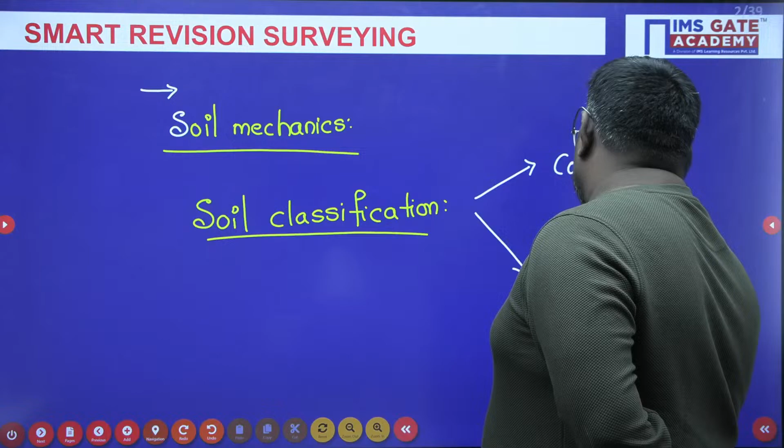Now, how do we classify these soil particles? If the percentage of soil retained on 75 micron sieve is more than 50%, we call it coarse grained soil. If the percentage of soil passing through 75 micron is more than 50%, we call it fine grained soil.

Now let me go in detail. We have some organizations like Public Road Administration, American Association State Highways Transport Officials, and Highway Research Board. All these organizations are related to roads, so they wanted to identify the soil best suited for pavements. They classified the soil into 7 groups, suitable for pavement design.

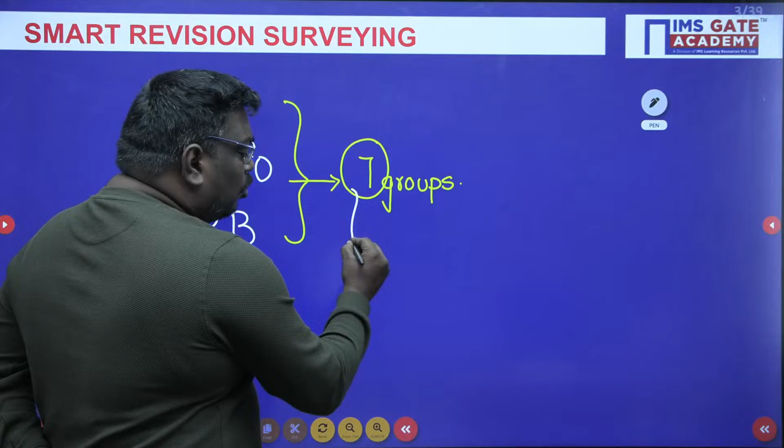Now these groups, when I talk about the 7 groups, what are the group names here? A1, A2 and so on up to A7 groups. There are 7 groups, meaning they have given the names A1 through A7.

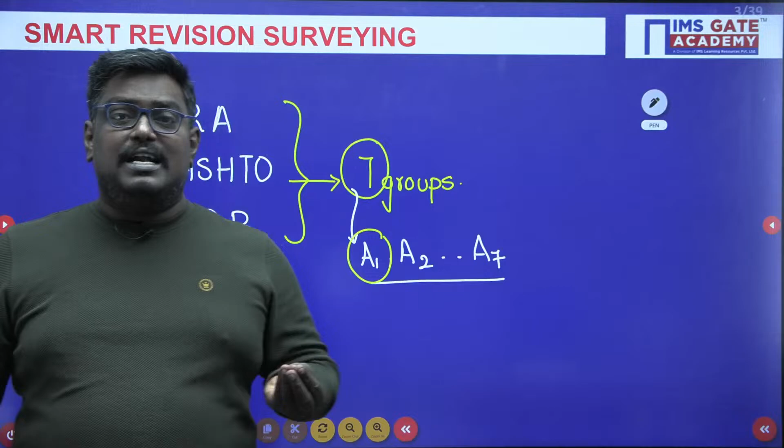Now my dear students, which is the best group? I would like to tell you, smaller the group number, better is the soil for pavement. So they can make a story in the GATE question, like these are some 7 groups, A3, A4 and A5, which is the best soil for pavement? So you remember that smaller the number, better is the soil for pavement.

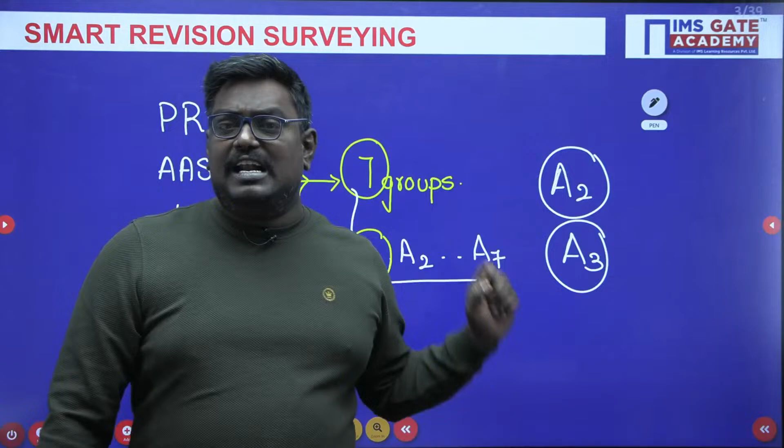Now suppose if there is Sai or Swetanshu, they might get a soil A2 and A3. Now they can ask me which is the best soil, A2 or A3, then definitely A2. But both have got A2, then which is the best soil?

Now comes the concept of group index, sir. Group index is a term. See students, group index is a term which is used to indicate the quality of the soil within the same group.

Muskan Ansari, sir, student from BSc Maths final year, eligible for GATE in CS? Muskan Ansari, when you are studying mathematics but want to write CS branch, I think you should have an engineering background. To be more clear, please join our Telegram group and I will be replying there. As far as I know, you should have an engineering background to write the computer science paper, but to explain you clearly, please join our Telegram group and I will go through the entire notification again on which other BSc students can write. But BSc Mathematics students, as of my knowledge, cannot write, I think.

Okay sir, now group index is used to indicate the quality of the soil within the same group. So when I talk about group index, if you have A1, A2, A3, it is a quantity used to indicate the quality of the soil within the same group.

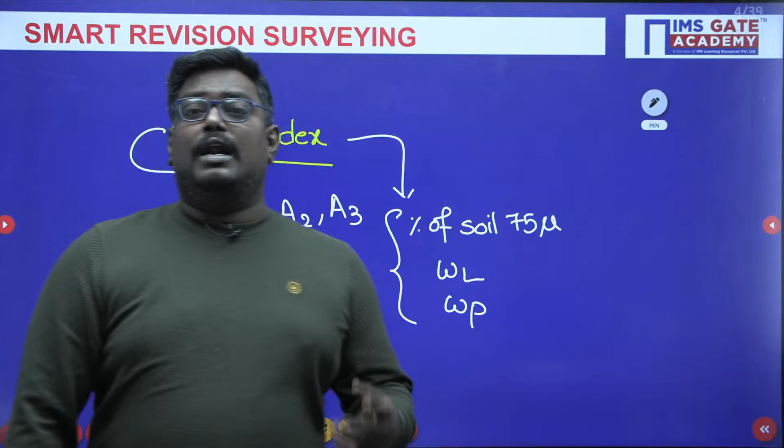Now see students, we have Casagrande. Casagrande has given a soil classification system name, the Airfield Classification system. Or you can say the Airfield Classification system was discovered by Casagrande.

Now my dear students, if I talk about the Indian Standard Soil Classification System, it is derived from the Airfield Classification system. The Airfield Classification depends upon grain size distribution, or particle size distribution, compressibility and plasticity characteristics.

Sir, you can ask me why I am explaining the theory part also. Nowadays in multiple select questions, you should have an idea what are the assumptions and on what basis they are classifying. So the Airfield Classification system is discovered by Casagrande, and the Indian Standard Soil Classification System is derived from it, so it also depends on the same parameters: particle size distribution, compressibility and plasticity characteristics.

Now my dear students, let me tell you one important thing. If you talk about gravel, how do we represent it? Gravel is represented by G, sand is represented by S, silt is represented by M, organic soils are represented by O, and clay is represented by C.

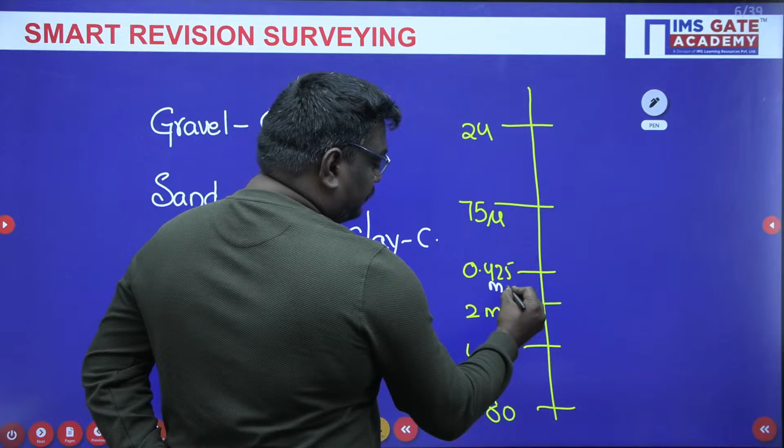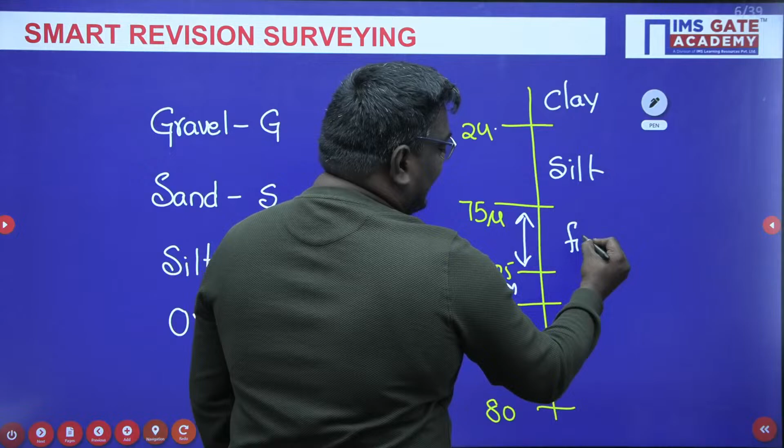Below 2 micron we call it clay, 2 micron to 75 micron it will be silt, 75 to 0.425 mm it is fine sand, 0.425 to 2 mm is medium sand, 2 mm to 4.75 mm is coarse sand, 4.75 to 80 mm is gravel, more than 80 mm is cobble, and more than 300 mm is boulder.

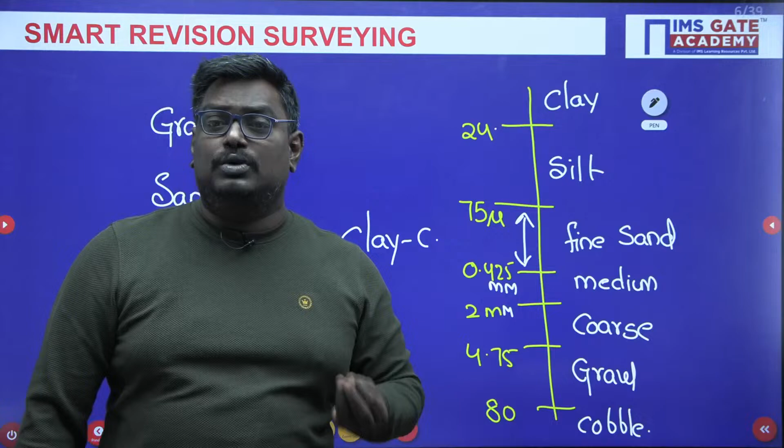Whenever you want to classify the soil, these ranges are very important, my dear students. That is the reason I have given you this insight.

Now coming to the most important topic, we have a topic called the plasticity chart. Let me tell you how this plasticity chart has been drawn. Obviously, one more thing: clay will have more plasticity.

When I talk about plasticity: when liquid limit is less than or equal to 35 percentile, we call it low compressibility. When liquid limit is between 35 to 50, we call it intermediate compressible. And when liquid limit is more than 50 percentile, we call it highly compressible.

These values are important. Remember, above the A-line means plasticity will be more, so definitely clay. Below the A-line, it can be an organic soil or it can be silt.

If you talk about the equation, please go through this: when liquid limit is less than or equal to 35, it is low compressible; 35 to 50 is intermediate compressible; and more than 50 is highly compressible.

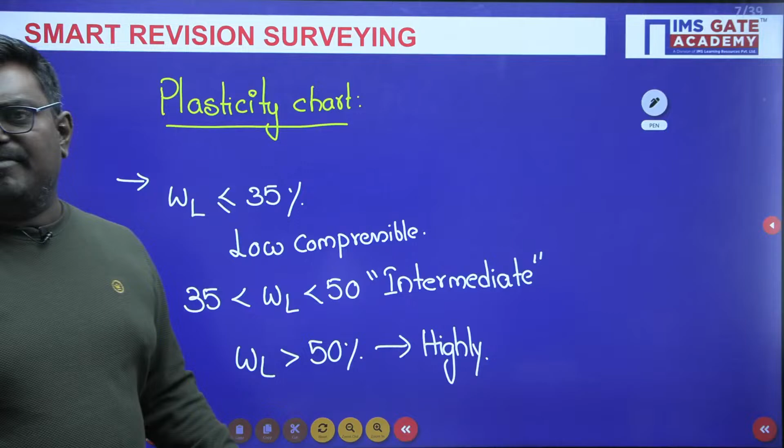So here what you have to do... yeah, greater than 50 percentile. Very good answer, Arvind. Now suppose if I have drawn the graph, sir.

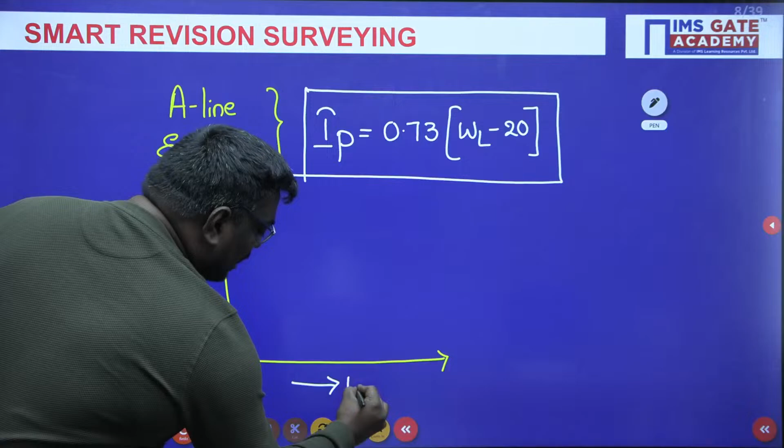If a graph is drawn between plasticity index IP and liquid limit WL, the A-line chart will look somewhere like this. If you see the intercept, it is 20, so you have to maintain this value as 20. Now I will draw the lines here: this will be equal to 35 and this will be equal to 50.

When the value is between 4 to 7, taking this value as 4 and 7, here you will have the dual nature of the soil, that is, it will have both clayey nature and silty nature. Very good answers by Arvind, sir.

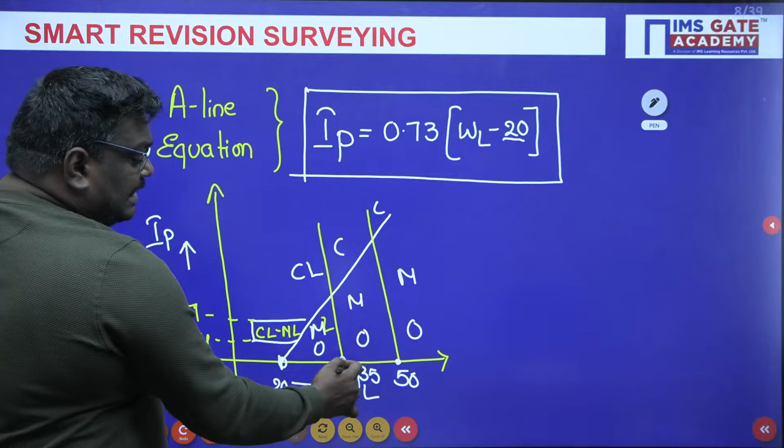Less than 35: above the A-line we call it clay, so I'll write C. Below A-line it can be M or organic soil. Less than 35 you call it L (low). 35 to 50 is intermediate, so I. More than 50 is highly compressible, so H. The plasticity chart is helpful in classifying soils.

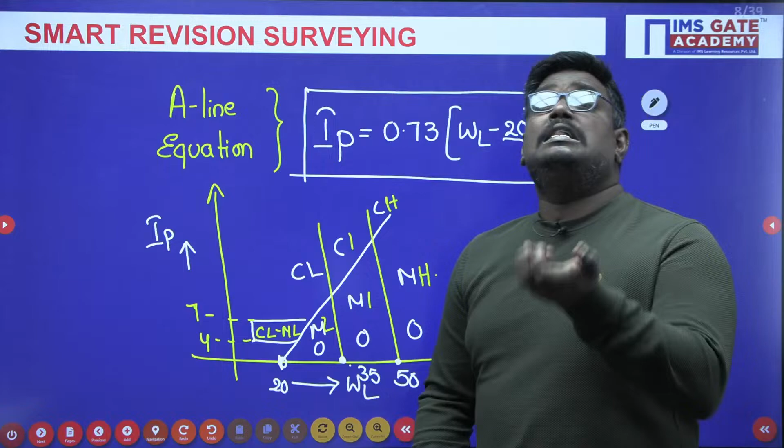So how the soil is classified: suppose if they give you liquid limit as 40 percentile and plastic limit as 25 percentile, what will be the IP value? WL minus WP, 40 minus 25 is 15 percentile.

But if you calculate from the A-line equation, you will also get IP. IP is equal to 0.73 into 40 minus 20. If you calculate this, you get around 14.66. So the A-line is located at 14.66.

But what is the value you got? 15. Is 15 above or below the A-line? The A-line is located at 14.66, and IP is 15, which you calculated from the traditional method, that is WL minus WP. So from that it is more, meaning 15 will be somewhere here, above the A-line.

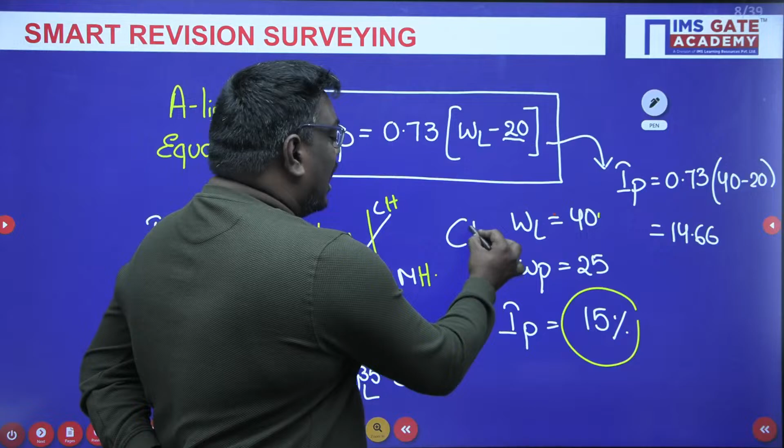Above the A-line means it will be clay. And remember, the liquid limit is between 35 to 50, so the answer will be CI. Are you getting this, my dear students? So again I would like to repeat here.

What I would like to tell you is, first calculate the location of the A line. Very good answer, Arvind. The location of A line is 0.73 into liquid limit minus 20, and you got A line as 14.66. By traditional method, IP equals WL minus WP, you will get 15. So it is 15, more than 14.6.

Why it is low? See, Arvind, you are wrong. Just check it up. Because here, what is the liquid limit value? Liquid limit value is 40 percentile. It is not 35. 40 is in between 35 and 50, so it is an intermediate compressible. I hope you are clear, Arvind.

Okay, now see students, you can ask me one more thing, sir. Very good answer. One more thing you can ask me here is, sir, how do I differentiate organic soil and silt soil?

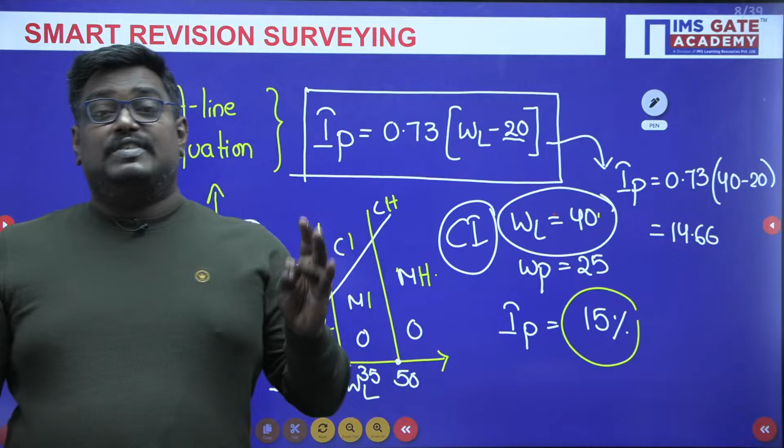Now the logic is simple. In case of organic soils, there are some specified tests. First we have the color test. Color of organic soils will be dark grey or brown color. Second, the odor of the organic soil is very bad.

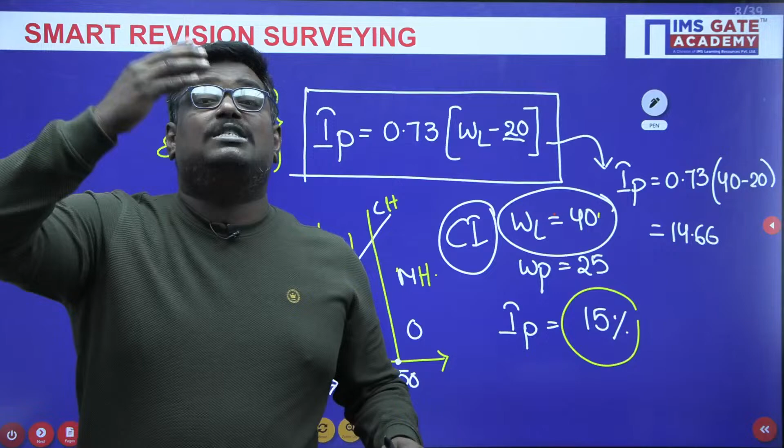The third point, a very important point: the liquid limit after oven drying reduces by more than 25%, then we call it organic soil. If the liquid limit after oven drying reduces by more than 25%, then we treat it as organic soil. That is a very important test.

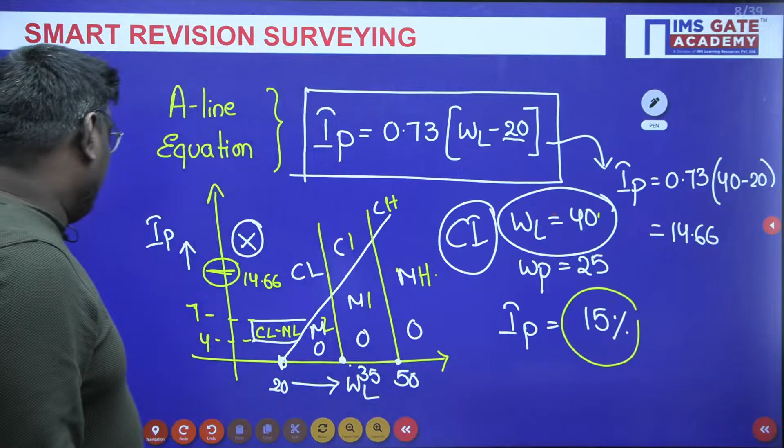Next, sir, what do you mean by fines? Fines is nothing but the percentage of soil passing through 75 micron. When fines are less than 5 percentile, we talk about either well-graded gravel or well-graded sand concept. And remember, if the fines are more than 12 percentile, we talk about clayey or silty nature.

But when the fines are between 5 to 12 percentile and IP value between 4 to 7, you will have dual nature of the soil samples.

Here I would like to tell you, suppose they have given you silty sand, how do you represent it? Silty sand means the sand composition is more than silt composition. So as you move towards the right, the composition increases, so first give priority to composition. So sand is represented by S and silt is represented by M.

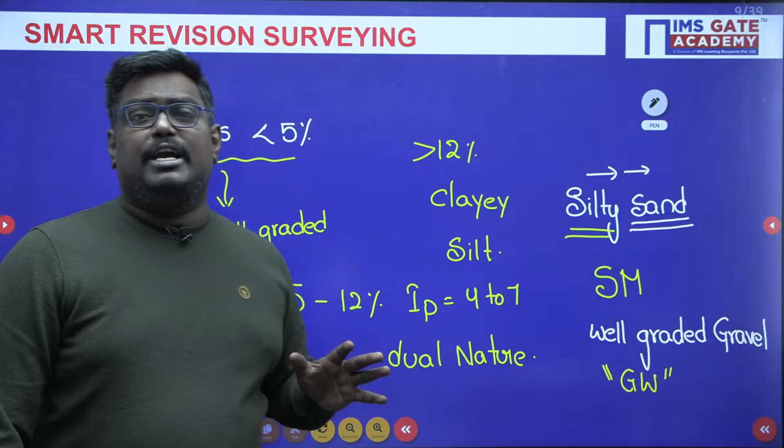Suppose if they give you well-graded gravel. Now students, if they ask you what do you mean by well-graded gravel. Very good, sir. So when you talk about well-graded gravel, it can be GW. What I would like to tell you is, when fines are less than 5%, we talk about either well-graded or poorly graded; we will not talk about clay nature or silty nature.

So let me quickly revise the concept related to soil classification. Public Road Administration, Highway Research Board, and American Association of State Highways and Transport Officials wanted to identify the soil best suitable for pavement. So they classified the soil into 7 groups, A1, A2 through A7. Smaller the group, better is the soil for pavement.

But if the soils are of the same group, then group index is used to indicate the quality of the soil within the same group. Group index is based on percentage of soil passing through 75 micron, liquid limit and plastic limit. When I talk about Casagrande, he discovered one classification system called the airfield classification system.

Indian standard soil classification system is derived from the airfield classification system. Indian standard soil classification depends upon particle size distribution, compressibility and plasticity characteristics. Here we have two types of soils: one is coarse grain and the other is fine grain. If the percentage of soil retained on 75 micron is more than 50%, we call it coarse grain. If the percentage of soil passing through 75 micron is more than 50%, we call it fine grain.

Here clay is represented as C, silt is represented by M, sand is represented by S, gravel is represented by G, and organic soils are represented by O.

When liquid limit is less than or equal to 35, we call it low compressible. From 35 to 50, it's intermediate compressible. More than 50, it is highly compressible.

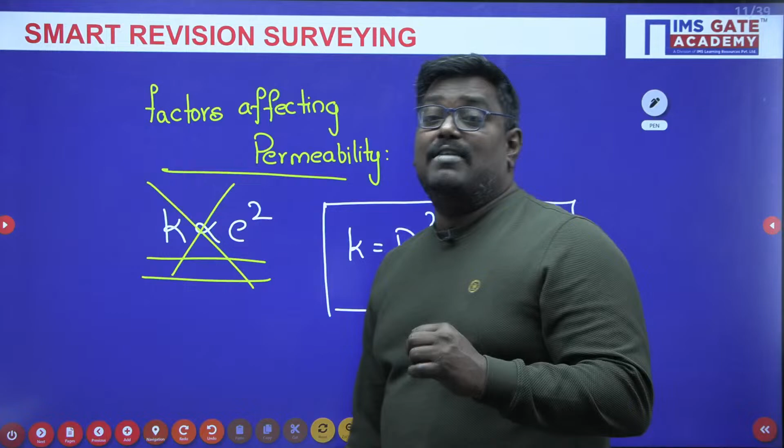Why? Because permeability will be less in case of clay and silt, and permeability will be more in case of gravel and sand. This is a very important observation. Permeability will be more in gravel and sand where the void ratio is less, because permeability depends upon the size of the void.

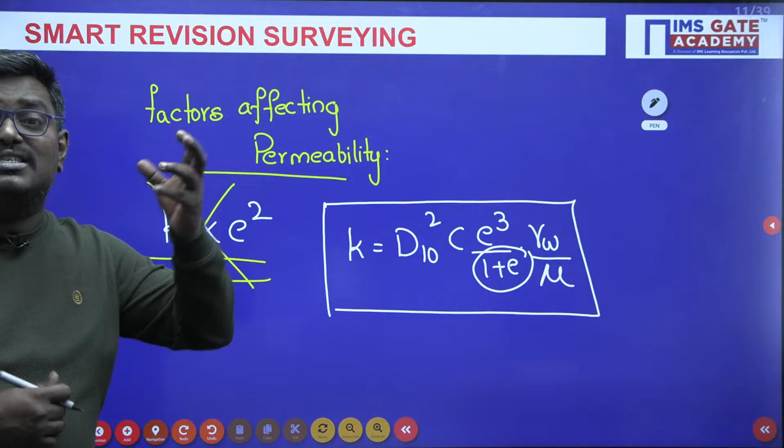If it does not depend on void ratio, actually more the size of the void, more the flow; less the size of the void, less the flow. So practically permeability is inversely proportional to the void ratio. But more precisely, permeability talks about the size of the void, not the void volume or anything.

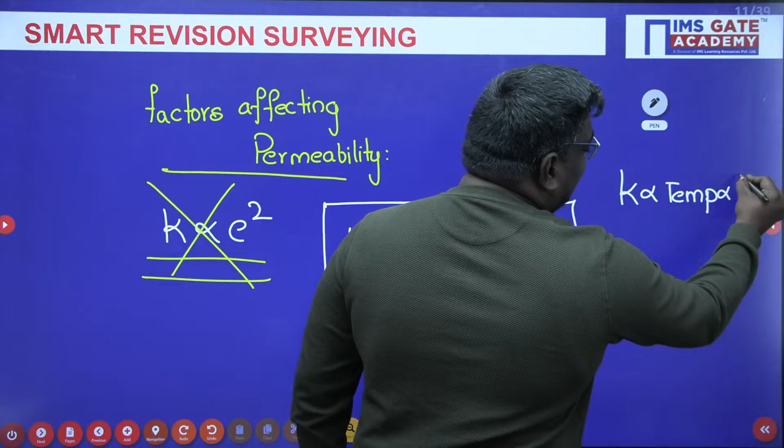Next, permeability increases with increase in temperature with a decrease in viscosity. How will I explain this? Suppose if you pour some oil on the floor, to scatter the oil, it will take more time. But if you heat the oil, it loses its viscous nature and the flow will be more.

Permeability increases with increase in temperature with a decrease in viscosity. What I am telling you is, if I have taken an oil which is viscous in nature, and I try to boil the oil, whatever oil is boiled will easily flow. So that is one of the other important factors.

Another important thing is, permeability will be more for fully saturated soils when compared to partially saturated. Why? Because fully saturated means voids are completely filled with water. More the water, more the permeability; less the water, less the permeability.

Now, what are the tests to determine permeability? The first one we have is the constant head test. In constant head test, head is kept constant and discharge is measured. It is very difficult to maintain the head constant in fine grained soils, that is the reason constant head test is suitable only for coarse grain.

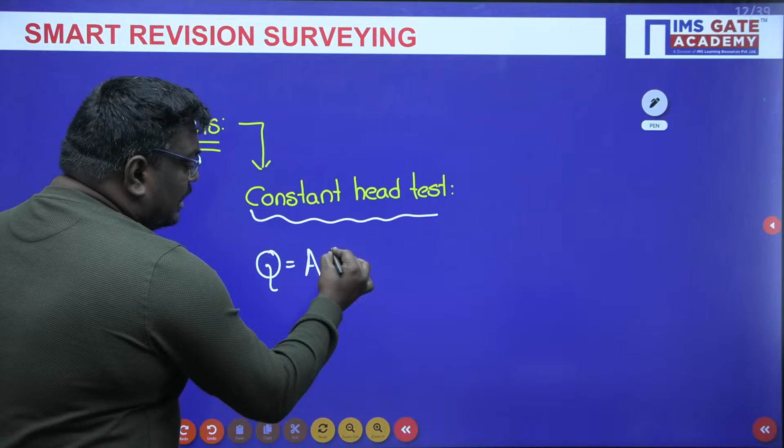Why constant head is suitable for coarse grain is, it is very difficult to maintain the head constant for fine grained particles. Here, constant head test Q is given by the formula Q equals A into I into K. You already know the continuity equation, Q equals AV, V equals IK. If you plug in those values, you get discharge equals AIK.

Next we have the variable head test. In the name itself, it is variable head test. What do you mean by variable head test? The head is consistently changing, that is the reason variable head test is also known as falling head test.

This test is more suitable for fine grain, because when you look at soil classification, sedimentation analysis is done to classify fine grain, since fine grain particles do not settle immediately. If you drop my pen, it immediately falls due to weight, but very tiny particles take some time to settle. So for variable head test, it is very difficult to maintain the head constant, hence the name.

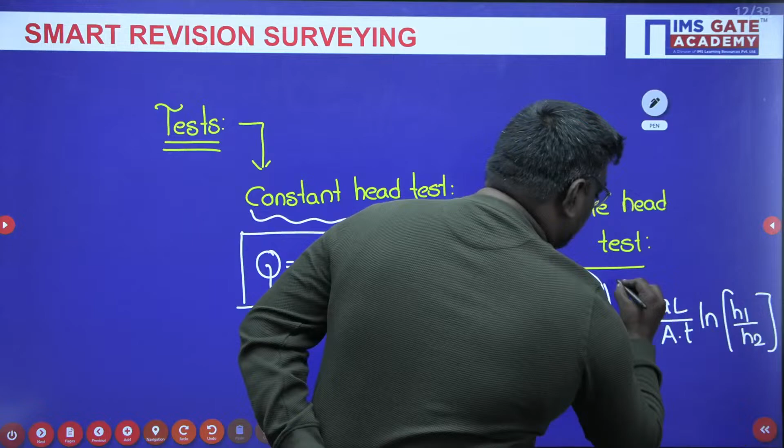So it is given by the formula K equals aL by AT into ln of H1 by H2. This is the formula for coefficient of permeability. Now, what is a? Small a is the area of the standpipe.

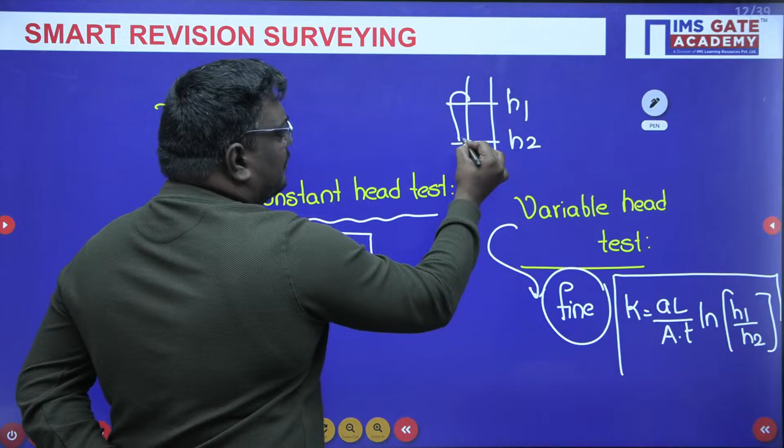L is the length and capital A is the area of the sample. T is the time taken for head falling. Suppose the head is at H1 here and sample is here, head is at H2. Time taken for head falling from H1 to H2 is nothing but T. And ln is natural log.

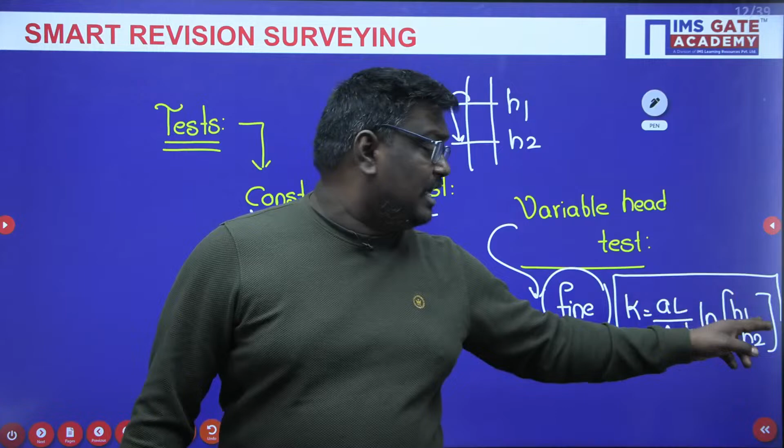If you want to remove the natural log, multiply with 2.303, because some people might be confused, asking why I have not written 2.303. If I write 2.303, then ln will become log to the base 10. So this is the formula for variable head test.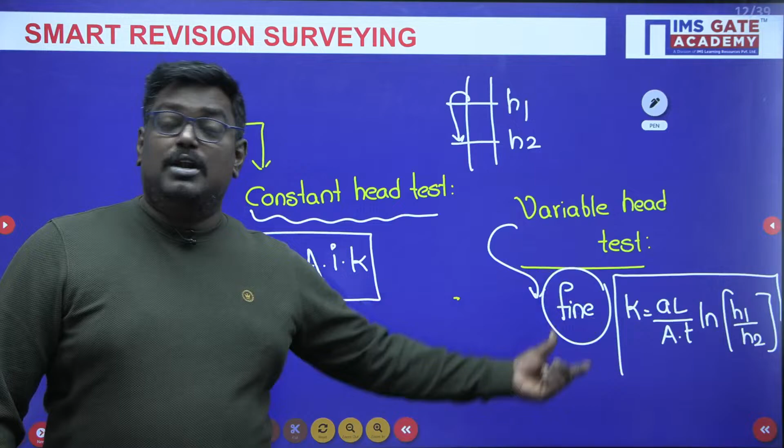Constant head test is very suitable for coarse grained soil, and variable head test is suitable for fine grained particles.

Now we have another concept called horizontal permeability, or permeability in parallel flow. Let's see the conditions, since most people worry about the formula, but here the conditions are very important. In horizontal permeability or parallel flow, discharge will be summation between the layers of soil, but head loss will be constant.

These things will help you in solving the problem. So in horizontal permeability, discharge will be summation, and horizontal head loss will be the same.

Now, horizontal permeability KH can be written as: KH equals summation from i=1 to n of Zi Ki, where Z is the depth of the soil strata, divided by summation from i=1 to n of Zi. Remember, this is the formula for horizontal permeability.

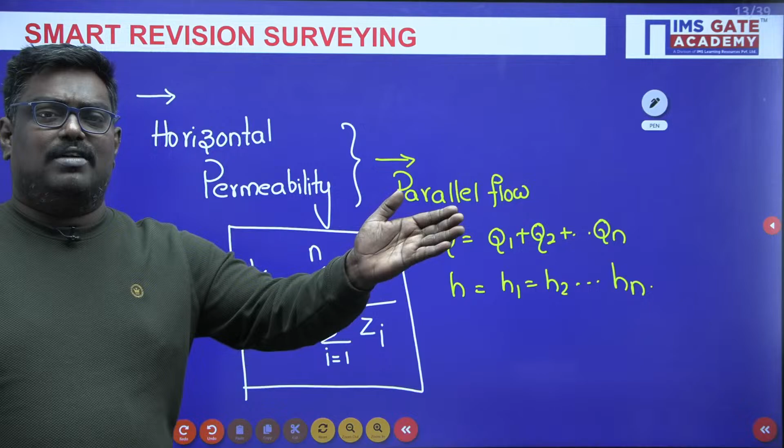So you can simply write Z1K1 plus Z2K2, upon Z1 plus Z2, if you take two layers. This is how the formula works for horizontal permeability.

I might be fast in this session because, by name itself, it's a revision session. I am hoping that you people are already aware of the knowledge.

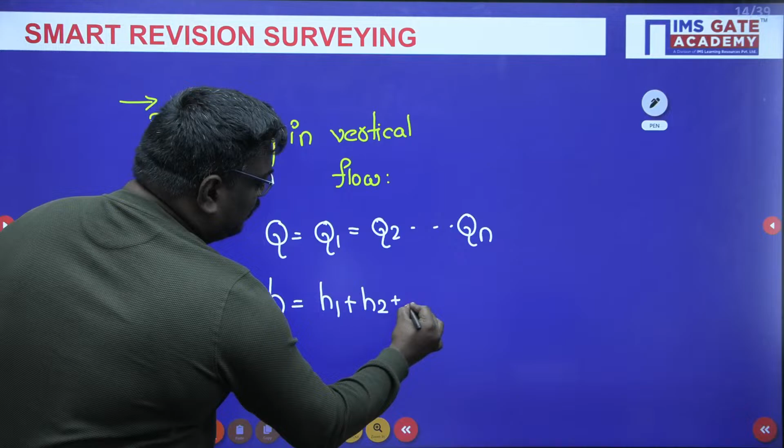In perpendicular flow, discharge will be constant. And remember, head loss will be equal to summation. So you can understand here: discharge will be the same and head loss will be summation in case of permeability in vertical flow.

Now when I talk about vertical permeability, it is given by the formula: summation from i=1 to n of Zi, divided by summation from i=1 to n of Zi/Ki. And this is for vertical flow.

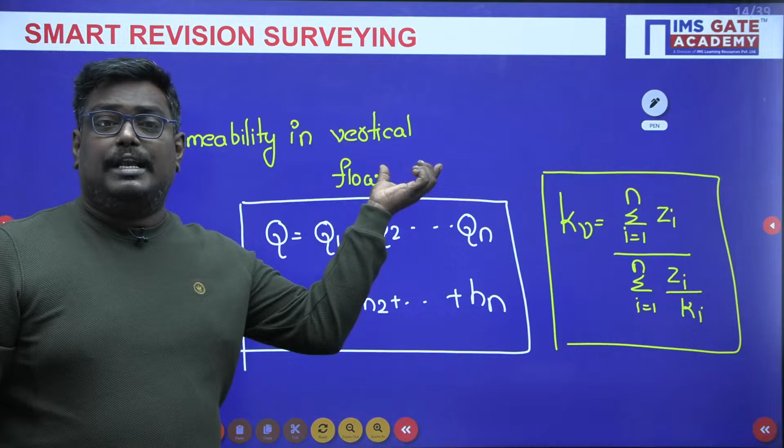See, with these conditions, people actually try to solve the problem. Remember, whenever they ask you about vertical flow or perpendicular flow, the formulas will be the same.

You should know that in perpendicular flow, or vertical flow, discharge will be the same and head loss will be the summation. These things you should be aware of.

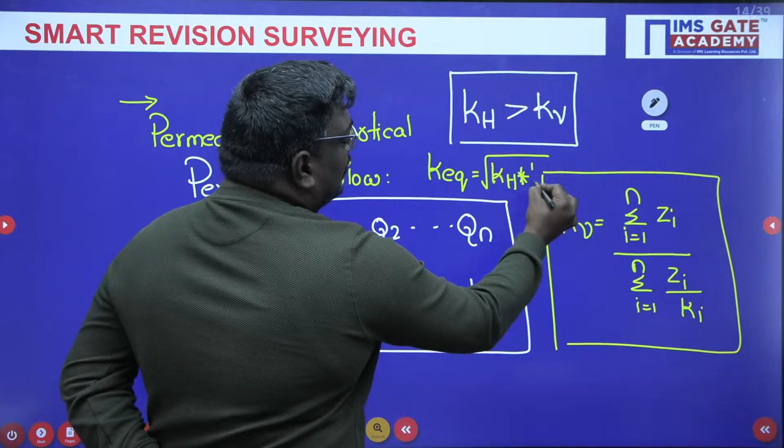You should understand that horizontal permeability is always greater than the vertical permeability. Remember, the equivalent permeability is nothing but the square root of KH into KV. Take the same values of Z1 and K1 and calculate horizontal permeability and vertical permeability. When you solve it mathematically, you can also prove that horizontal permeability is always greater than vertical permeability, and K equivalent is square root of KH into KV.

We have another concept called seepage velocity. Seepage velocity is given by the formula: Vs equals velocity upon porosity. The range of porosity is always less than 1, so seepage velocity is always greater than the actual velocity.

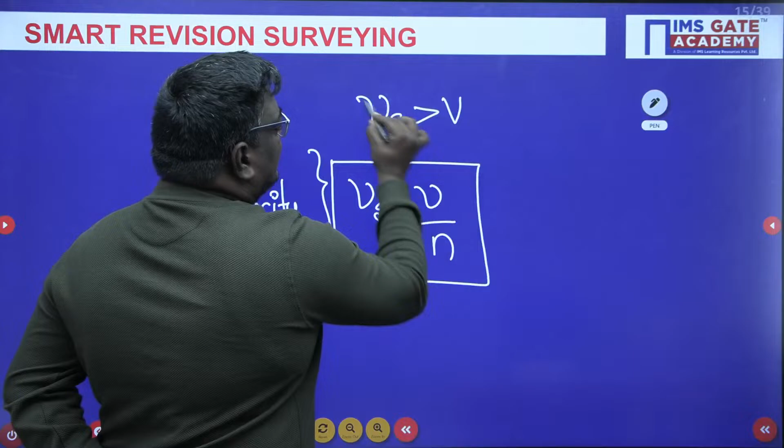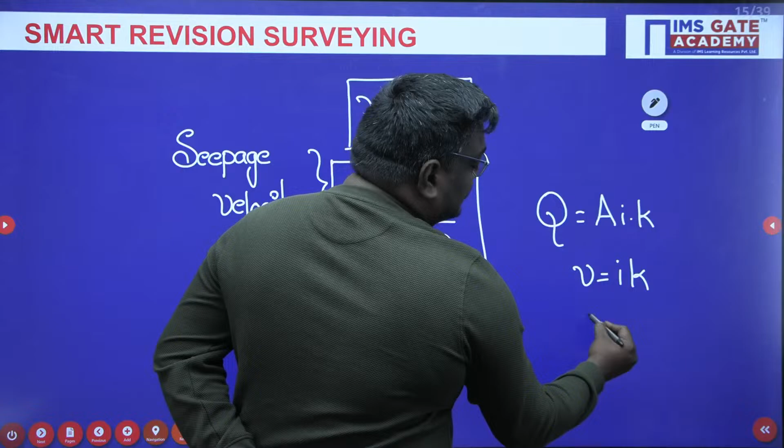With these formulas, we have seen very good questions in 2021 also. Q is equal to AIK, V is equal to IK, and seepage velocity is equal to velocity upon N. Using these formulas, they gave a 2021 GATE question.

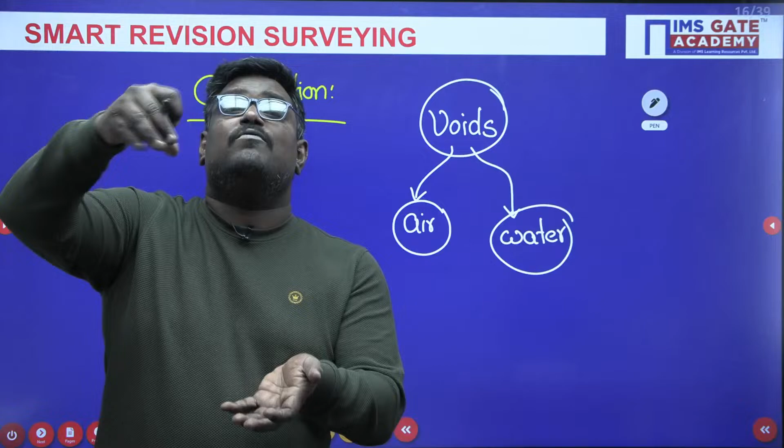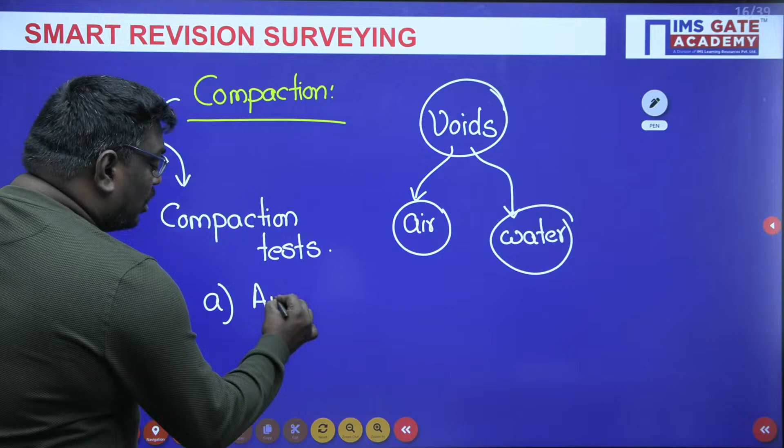Now see students, we have compaction tests like Indian Standard Lightweight Test, also called Indian Standard Proctor Test. Similarly, we have another test called Modified Proctor Test, also called Indian Standard Heavyweight Test. All these tests are done to determine the amount of compaction.

What do you mean by amount of compaction? It is nothing but the dry density. So compaction tests are done to determine the amount of compaction.

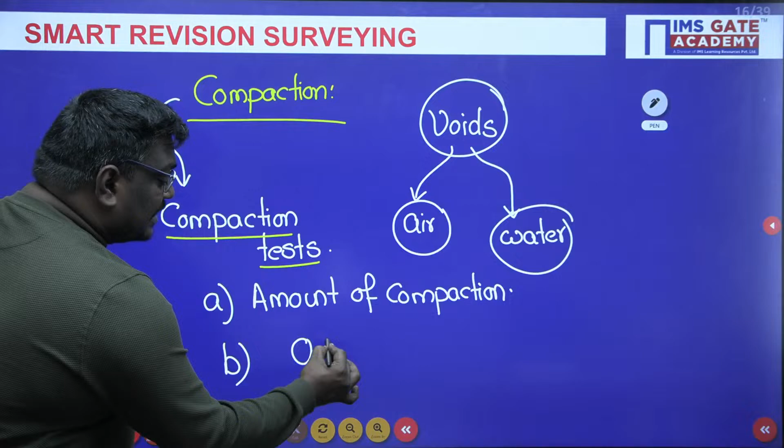The next thing is it is also used to determine the OMC. OMC means what? It is nothing but the optimum moisture content, the water content at which dry density is maximum. We call it optimum moisture content.

So what do you mean by compaction? It is the removal of air from the voids under a short-term moving vibrating loads. So compaction tests are done to determine the amount of compaction and also to determine the OMC, that is the optimum moisture content.

Now see students, when I talk about the Indian Standard Lightweight Test, or the Standard Proctor Test, there can be a question asked, sir. In Standard Proctor Test we have a cylindrical mold of 1 liter, and soil is arranged in 3 layers.

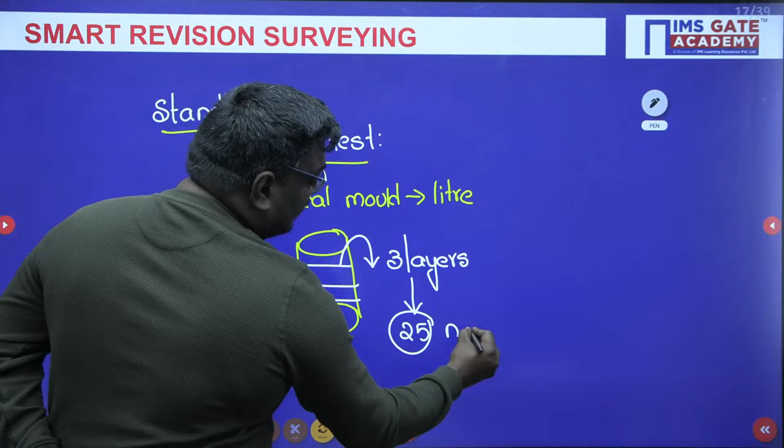Soil is arranged in 3 layers, and each layer is given how many blows? 25 number of blows are given for each layer. And what is the hammer weight, sir? Hammer weight will be 2.90 kg. And what do you mean by height of fall? Height of fall is equal to 31 centimeter.

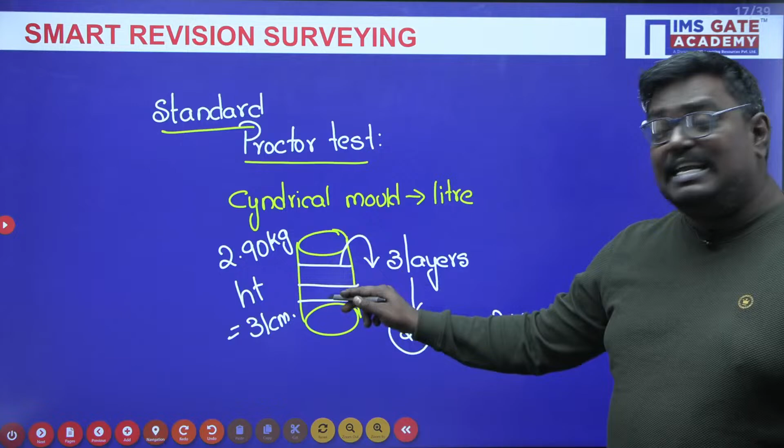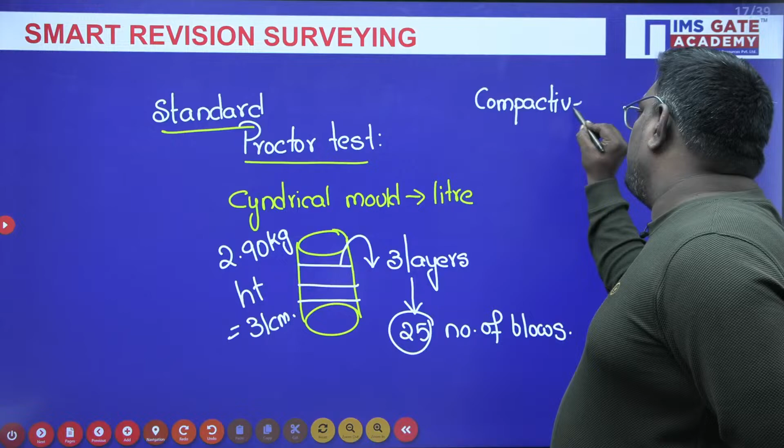So see students, when I talk about Indian Standard Lightweight Test or Standard Proctor Test, soil is arranged in 3 layers and each layer is given 25 number of blows. Sir, this can be a question asked in GATE: what is the compactive effort of Standard Proctor Test or Indian Standard Lightweight Test?

They can ask you this. See, whenever you are dropping a ball from a height, 31 centimeter or 310 mm, it will be converted to potential energy. Similarly, if you are applying blows, that is nothing but potential energy, which is mass into gravity into height.

So what is the weight of the hammer? It is nothing but 2.90 kg. And how many blows are you giving, sir? 25 number of blows. And how many layers? 3 into 9.81 into height of fall, which is 31 centimeter, or 0.39... actually 0.31 meter.

So it will be around how much, sir? If you solve this, you will get the value of the compactive effort of the Standard Proctor Test. If you solve this, you will get a value of 593.01 Newton meter. So I have given you the procedure, but some people might remember this directly. The compactive effort of the lightweight test or Standard Proctor Test is 593.01.

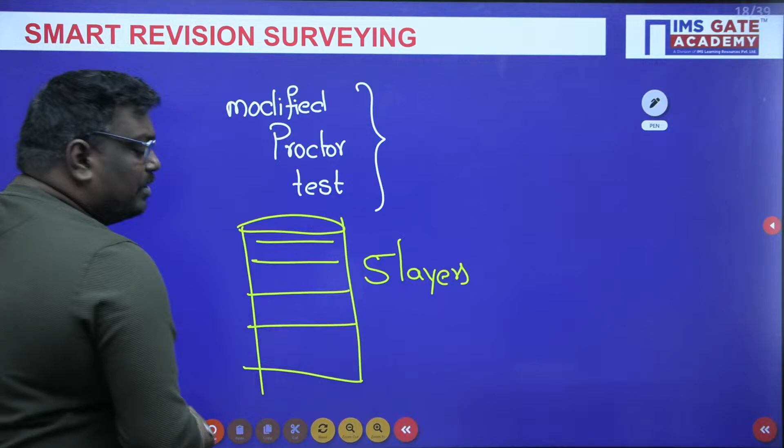Similarly, my dear students, when I talk about the Modified Proctor Test, also called the heavyweight test, here soil is arranged in 5 layers. The cylindrical mold here will also be 1 liter only, and each layer will be given 25 number of blows.

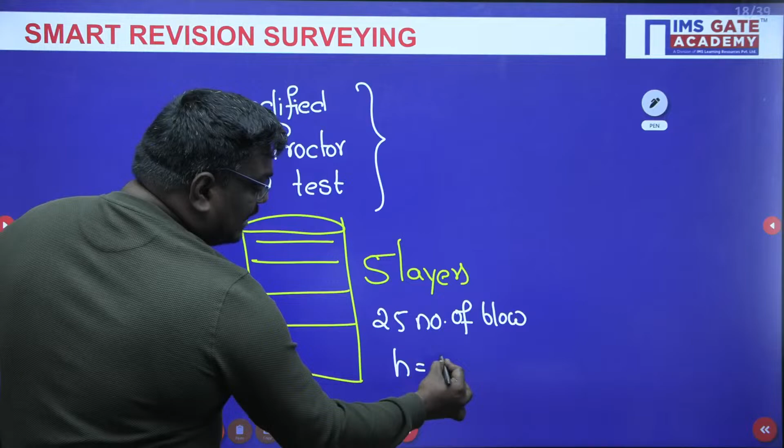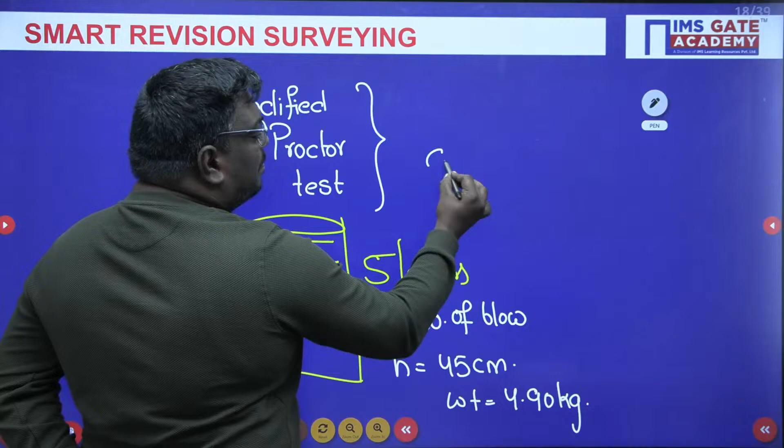And height of fall here will be 45 centimeters, and the weight of the hammer will be 4.90 kg. Now if you see, what is the compactive effectiveness of modified Proctor test? It will be 2703.88 Newton meter. Same formula, sir, mgh if you apply, it will be equal to how much? 2703 Newton meter.

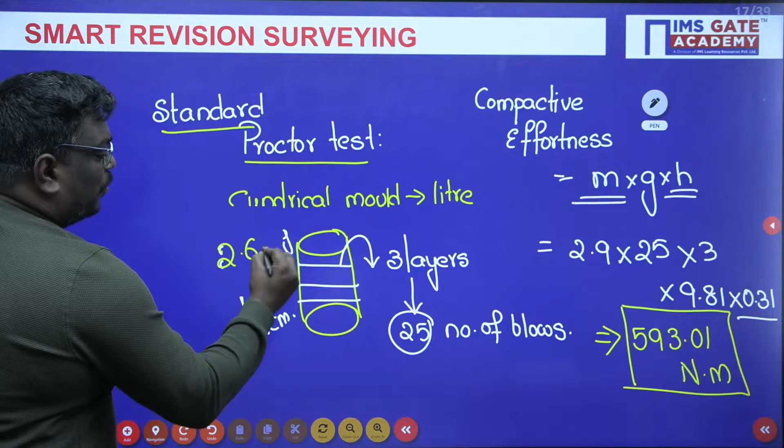Sir, here you can change. Actually I thought here it is 2.60 kg. Very good, Ammu, very good. Very good, Arvind. Here also you can change, sir. Here it is 2.6 into 25.

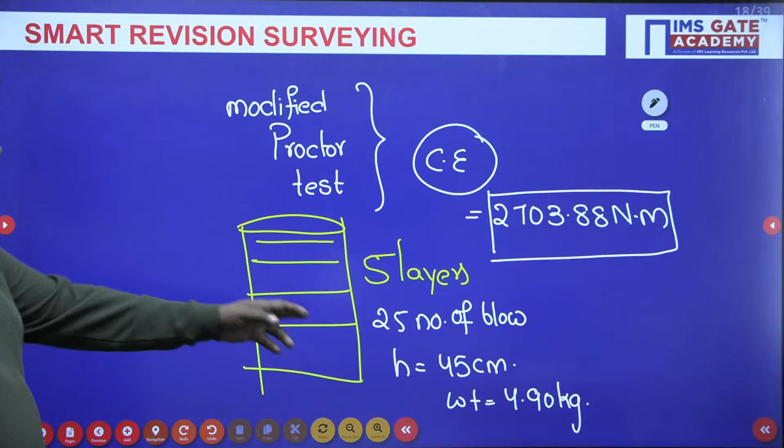Very good, Arvind. But here, students, it will be 4.90 kg, 45. Now how many layers, sir? 5 layers, 5 layers into 25 number of blows. Weight of hammer is 4.9 kg into 9.81 into height of fall is 0.45. If you solve this, you will get a value of 2703.88 Newton meter. Remember, this was a gate question.

Compactive effectiveness of modified Proctor test is 4.55 times the compactive effectiveness of standard Proctor test. And remember, if the soil retained on 4.75 mm is more than 20 percent, the cylindrical mold of 1 liter will be increased to 2.25 liters, and the number of blows will be increased from 25 to 56.

So what are the factors affecting compaction? Before going to the factors affecting compaction, you should be aware of this diagram.

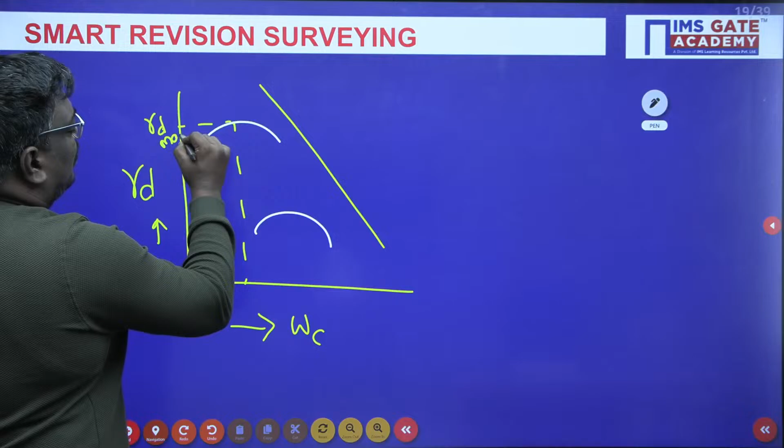If I draw a graph between dry density and water content, see students, even at lower water content, you are seeing maximum dry density. So this is the advantage of modified Proctor test. If you talk about standard Proctor test, even at higher water content, you are getting lesser dry density. And this is known as zero air void line.

My dear students, practically nowadays no one is using standard Proctor test. Everyone is using modified Proctor test in the field. If you consider highways or everywhere, people are using modified Proctor test only. And here, dry density is given by the formula: 1 minus Na, where Na is the percentage of air voids, into gamma W into G, upon 1 plus water content into G.

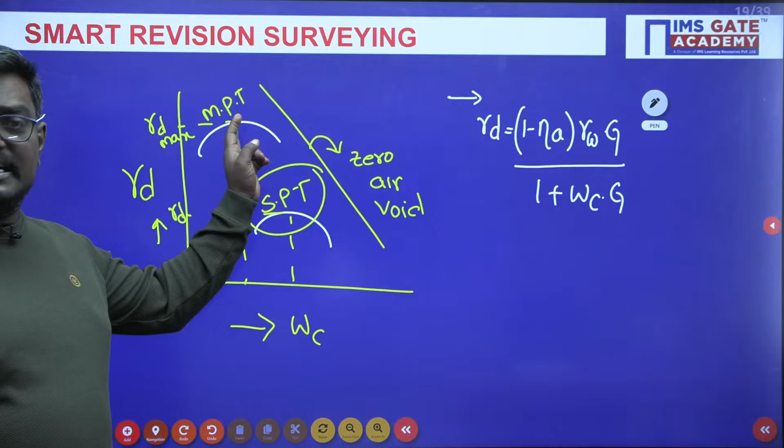So, students, what are the factors affecting compaction? They can ask you this. As water content increases, dry density increases, reaches a maximum value and then decreases. Another factor is, more the compactive effectiveness, more the dry density. And similarly, pure sands don't have a well-defined OMC.

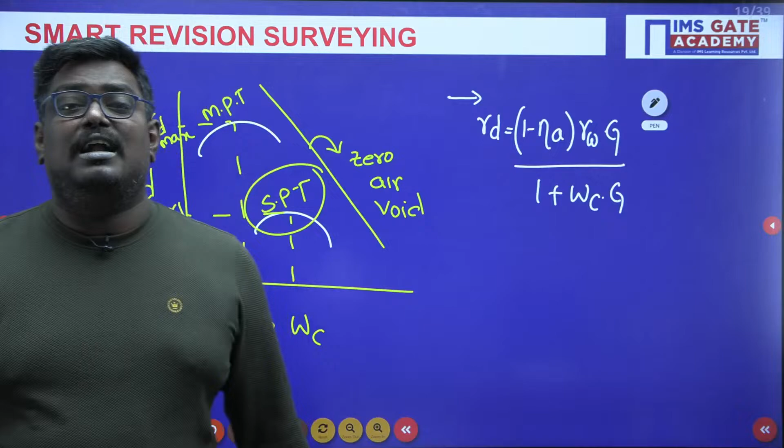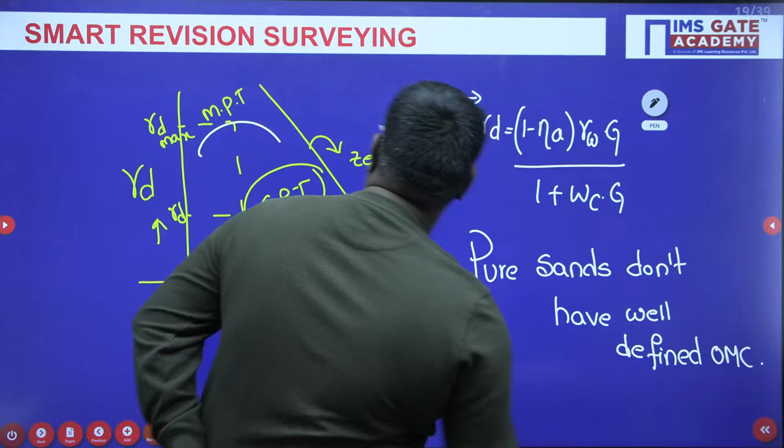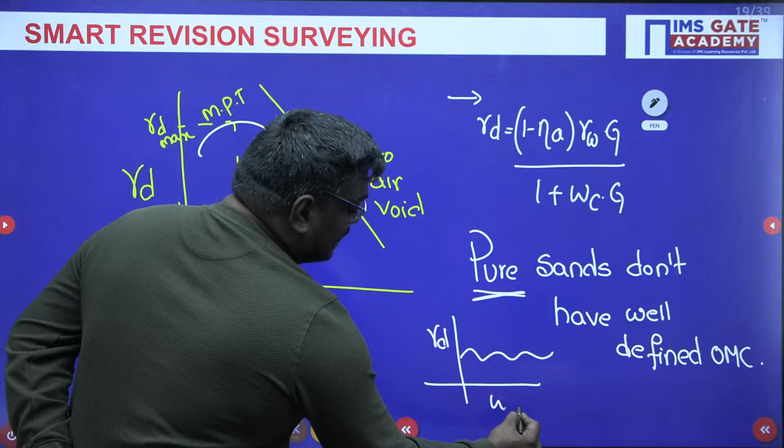This point everyone will ask me in the offline class also. Pure sands don't have a well-defined OMC. What is OMC? I told you, optimum moisture content. Here, this point is called the OMC of modified Proctor test and this is the OMC of standard Proctor test. OMC is the water content at which the dry density is maximum. But pure sands don't have a well-defined OMC, meaning the dry density versus water content curve will look like this - you cannot examine exactly where the dry density is maximum. There can be various locations. That is the reason pure sands don't have a well-defined OMC.

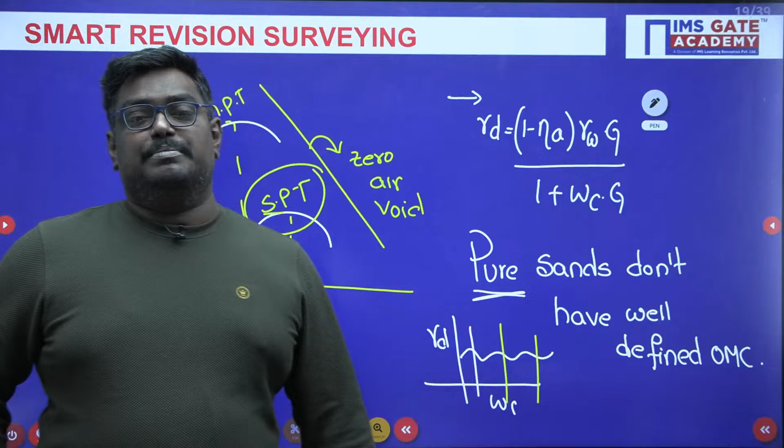Now, similarly, if I talk about relative compaction, what do you mean by relative compaction? Relative compaction is nothing but dry density in the field divided by maximum dry density in the laboratory, into 100. This is nothing but relative compaction.

Similarly, we have sheep foot rollers - we have different equipment. This was asked in one of the previous gate questions in match the following. Sheep foot rollers are useful for clays and pneumatic rollers are useful for both cohesive and non-cohesive soils. Vibrators are the best method for sand compaction. And in the Proctor needle test, a needle is pushed into the soil for a depth of 7.5 centimeters, and the resistance offered against penetration is measured. That is known as the Proctor needle test.

So again I repeat the thing related to compaction. What do you mean by compaction? It means the removal of air from the voids under a short-term moving vibrating load. Compaction is done to improve the shear strength, thereby improving the bearing capacity. We have different compaction tests done to determine the amount of compaction and dry density. We have two tests: the standard Proctor test and the modified Proctor test.

The standard Proctor test is also known as the Indian standard lightweight test. In the Indian standard lightweight test, soil is arranged in 3 layers, each layer given 25 number of blows. Hammer weight is 2.60 kg. Height of fall is 31 centimeters. Compactive effort is nothing but potential energy.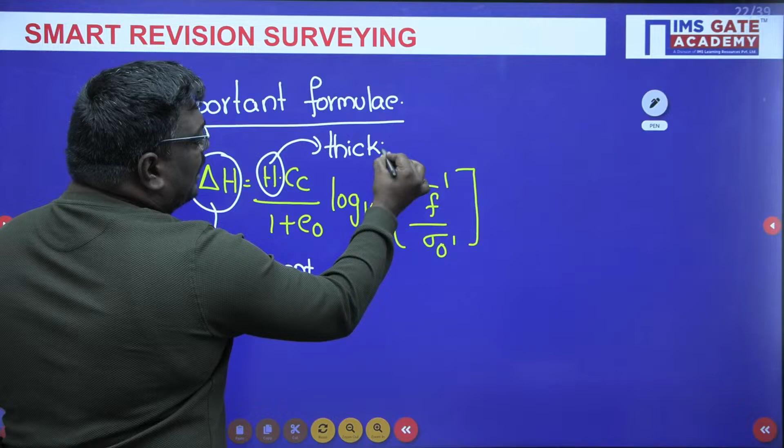These terms are very important. H is nothing but the thickness of the clay layer. You cannot take the total depth if there is a soil strata with 5 meters of sand and 5 meters of clay as 10 meters. Total depth should be taken as only the thickness of the clay, so it should be taken as 5 meters. H is nothing but the thickness of the clay layer.

Now, what is E naught? Initial void ratio. And what is Cc? Cc is nothing but the coefficient of compression index. It is given by the formula 0.009 into WL minus 10%. This is for undisturbed soil, and this formula is given by Terzaghi's equation.

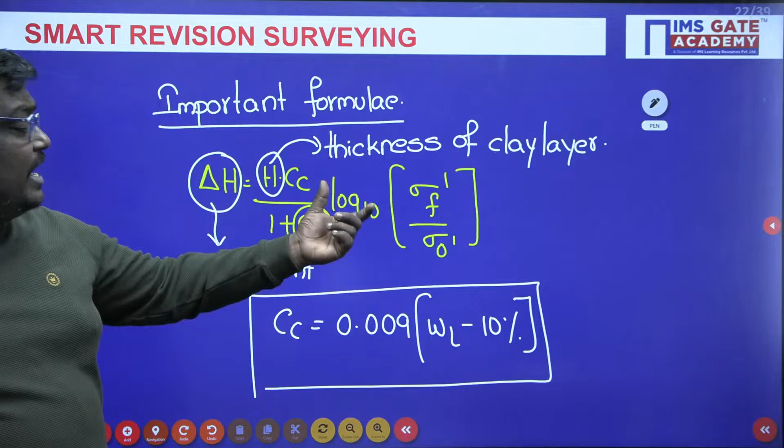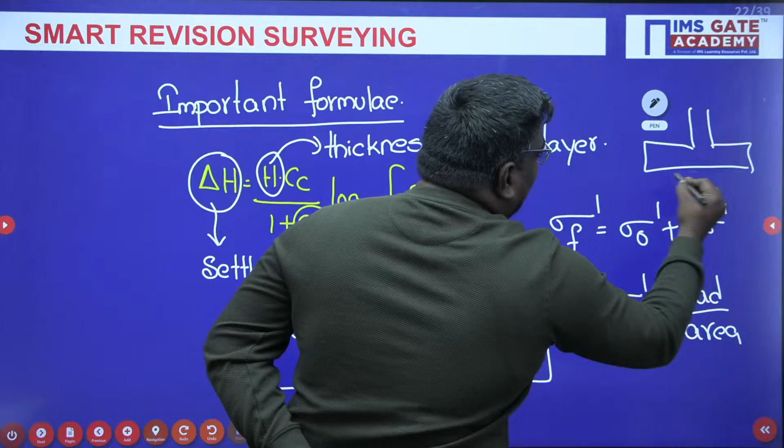Now, when you calculate it, final effective stress will be calculated as initial effective stress plus delta sigma. How do you calculate delta sigma? It is load upon area, but you have to use the trapezoidal rule, like a 2:1 distribution. Remember, you have to calculate the effective stress at the center of the clay layer, and the load distribution should be 2:1. I'll do one short on this formula because this year I'm expecting a question on this.

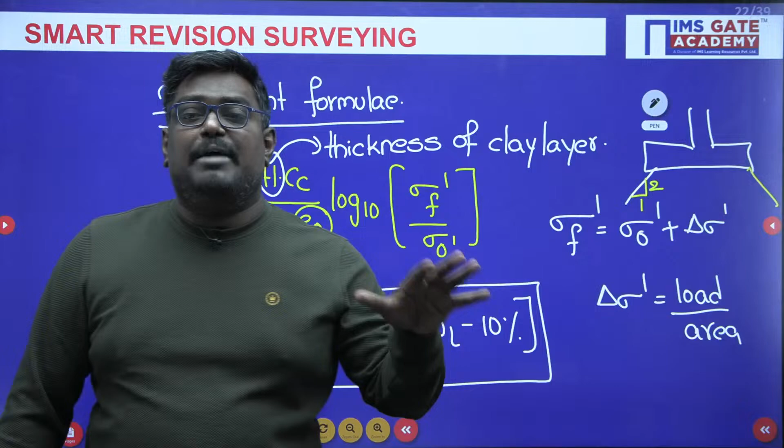Now if I talk about MV, MV is nothing but the coefficient of volume compressibility, delta H by H into delta sigma dash. So settlement can also be written as MV into H into delta sigma dash. Next we have the coefficient of compressibility, AV. Coefficient of compressibility can be written as delta E upon delta sigma dash. And you know delta H by H can be written as delta E by 1 plus E naught, so from this MV can be written as AV upon 1 plus E naught.

There is another important point. MV is the coefficient of volume compressibility, AV is the coefficient of compressibility. What will be the units? Units will be meter square per kilonewton. Just go through this slide again for a second.

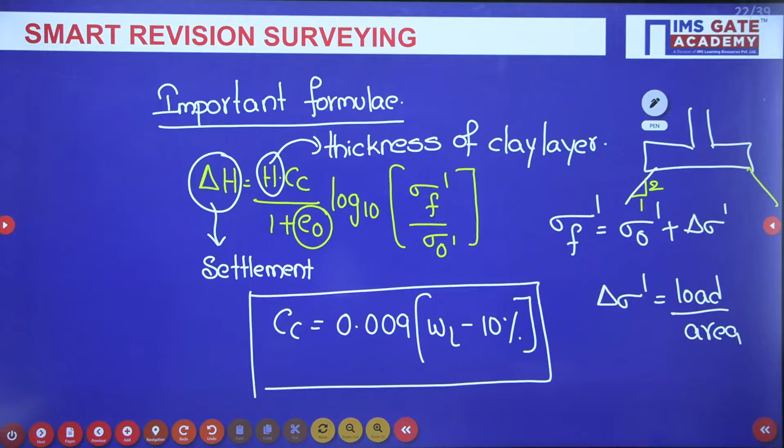Sorry for the interruption. Now, the next one we have is this time factor. What do you mean by time factor? Time factor is a function of degree of consolidation. This is a very important term. How do you relate time factor? Time factor TV is equal to CVT upon D square. If it is single drainage, you will take it as H; if it is double drainage, you will take it as H by 2.

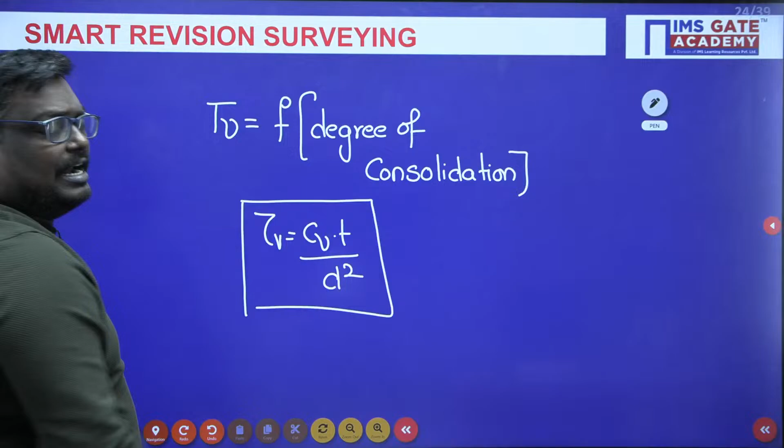Coefficient of consolidation can be written as K upon MV into gamma W. Now, if the degree of consolidation is less than 60, time factor will be equal to pi by 4 into U percentile by 100 whole square. If it is more than 60, time factor will be equal to 1.781 minus 0.933 into log 10 of 100 minus U percentile. So these are the formulas for time factor.

So let me quickly recap the entire thing. What do you mean by consolidation? Consolidation is nothing but the removal of water under a steady static long-term pressure. It is a very slow process. We have different stages of consolidation: initial consolidation, primary consolidation, and secondary consolidation.

In initial consolidation, it is the removal of air, not water. Just by applying the load, if you remove the air, then it is initial consolidation.

Primary consolidation means the removal of water under a steady static long-term pressure. Secondary consolidation occurs only after primary consolidation is completed, and it is the removal of highly viscous water and plastic readjustment of soil particles.

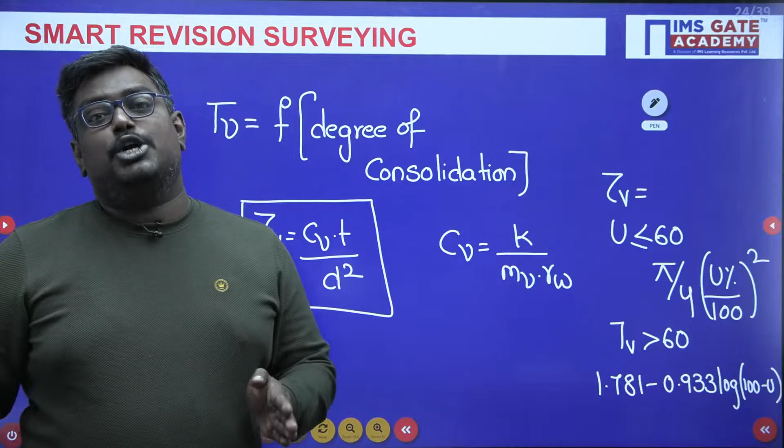It occurs at constant effective stress and is proportional to the logarithm of time. Terzaghi's theory is not applicable for secondary consolidation.

Talking about Terzaghi's piston model: we have a cylinder where the cylinder represents the voids and the spring represents the soil particles. Stress on the spring is the effective stress, stress on water is the pore water pressure, and the valve represents the permeability.

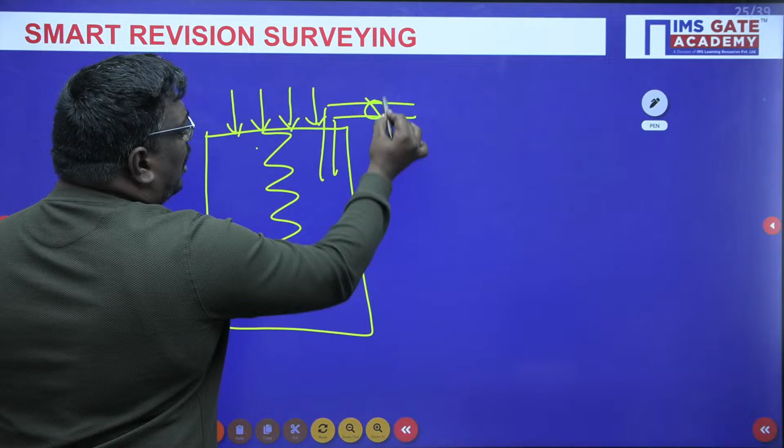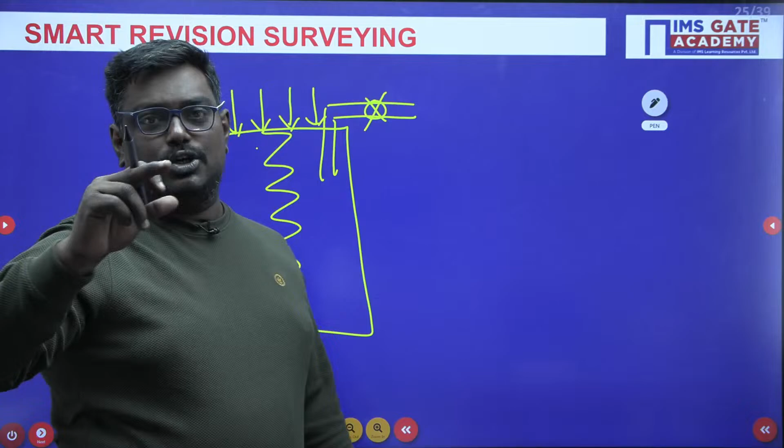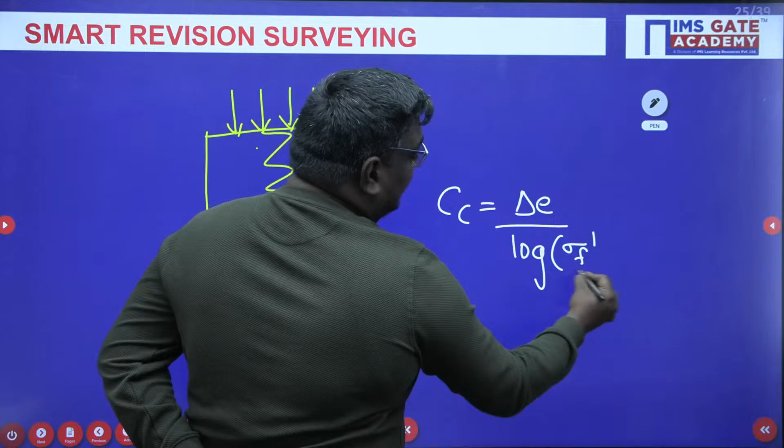Another formula for the coefficient of compression index can be written as delta E upon log of sigma final upon sigma initial, since there is a graph drawn between void ratio and final stress.

Recall the settlement formulas: settlement equals mv into h into delta sigma. And delta h by h is equal to delta E upon 1 plus E naught.

AV is equal to delta E by delta sigma. MV is equal to delta H by H into delta sigma, or you can write it as AV upon 1 plus E naught.

Time factor is equal to CV T upon D square. For single drainage it will be H, and for double drainage CV is equal to K upon MV into gamma W.

CC is equal to 0.009 into WL minus 10%. And TV is equal to pi by 4 into U percentile upon 100, whole square.

This applies when U is less than 60. When U is greater than 60, TV is equal to 1.781 minus 0.933 into log base 10 of 100 minus U percent.

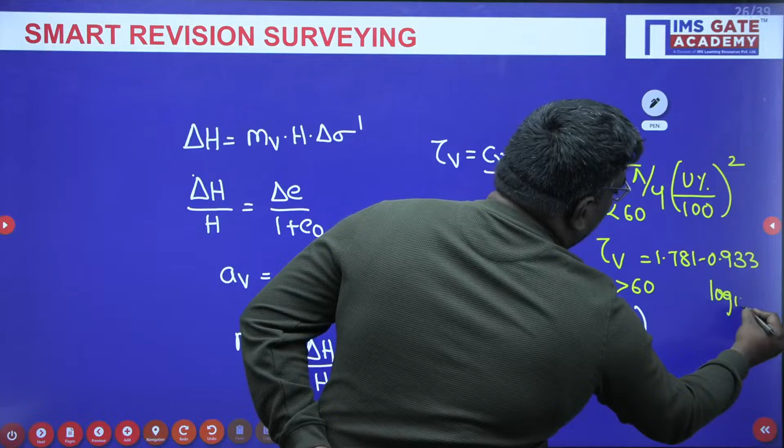My sincere advice: whenever you are preparing geotechnical consolidation, properties of soil, permeability, shallow foundation, deep foundation are all very important, so try to prepare that well.